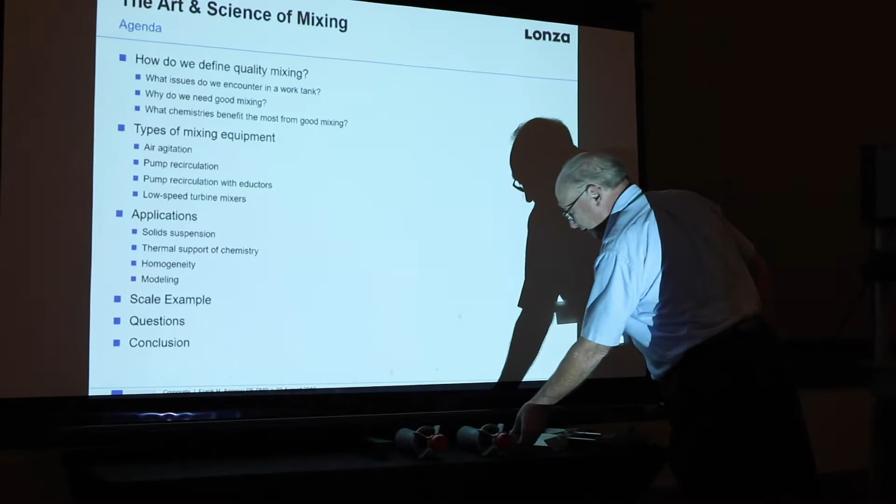There we go. Here's my agenda for today. How do we define quality mixing? I want to talk about what issues we encounter in tanks, why do we need good mixing, and what chemistry - some of this I've already covered in my introductory comments.

I want to talk about different types of mixing equipment, and I want to try and overcome some of the assumptions and presuppositions that are associated with what's good, what's bad, and what works best.

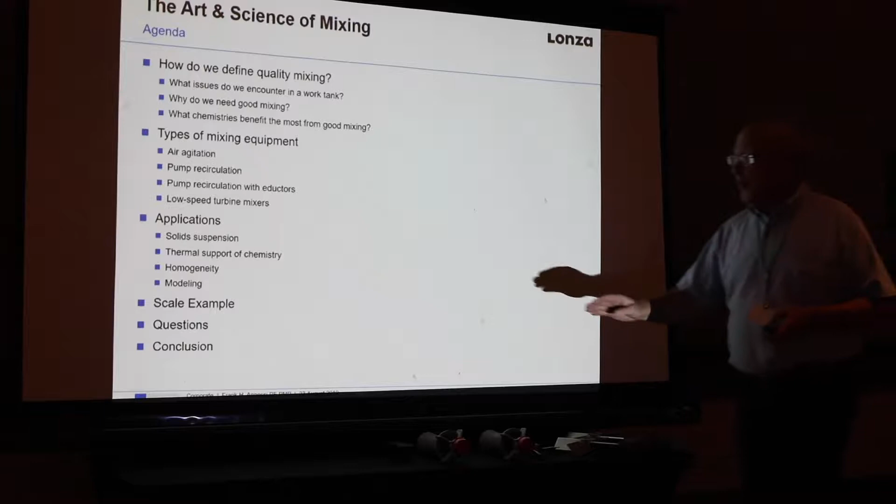Then I'm going to go through, and I'm hoping this will be helpful because, you know, Lonza does not manufacture penta or any oil-borne wood preservatives. However, the engineering group at Lonza has worked with every preservative system that's in North America. We have an extensive background. I've drawn on an example where we worked on a penta system to illustrate a couple of interesting features, and I want to suggest some things you can do with mixing and with creative uses of instrumentation.

And then what we're going to do is we're going to fire Junior up here, and I'll talk a little bit about what we've got here. Yes, it's water, it's not vodka, it's not margaritas, it's not anything like that. And no, we're not going to use this as the basis for creating a microbrewery. I don't know what I'm doing.

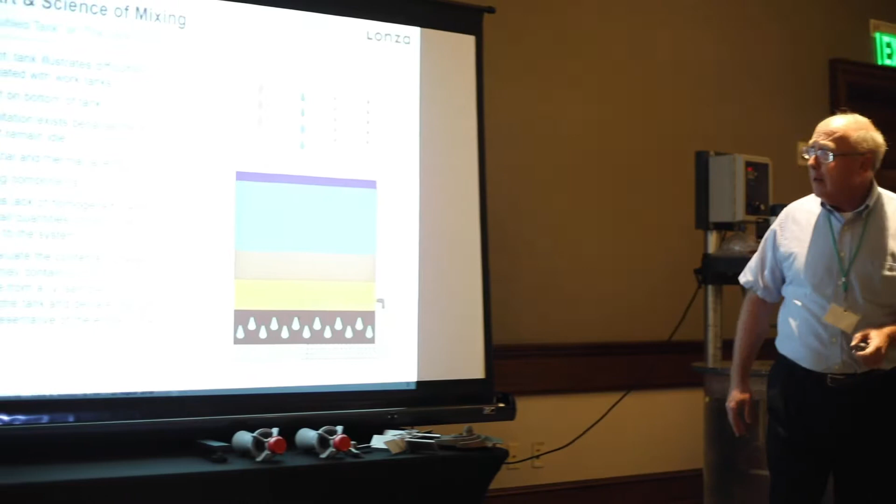So, if any of you have ever been down to Disney World, you know about the Tower of Terror. So I've made the Tank of Terror. I've tried to sit down and figure out how many different things can go wrong inside of a tank. I'm not saying this is comprehensive, but it's my best shot.

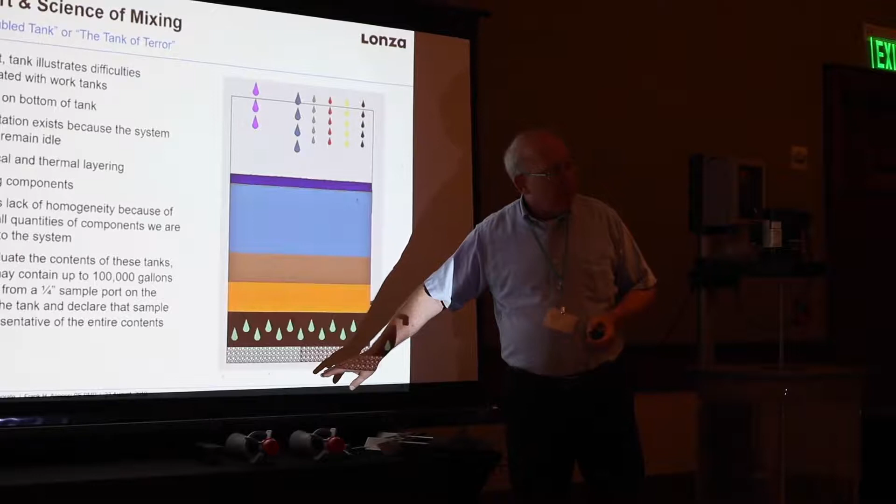So we could have fallout at the bottom of the tank. We could have CCA fallout. We could have debris from pentachlorophenol systems. Typically your CCA fallout is because of wood sugars reacting in the tank and precipitating.

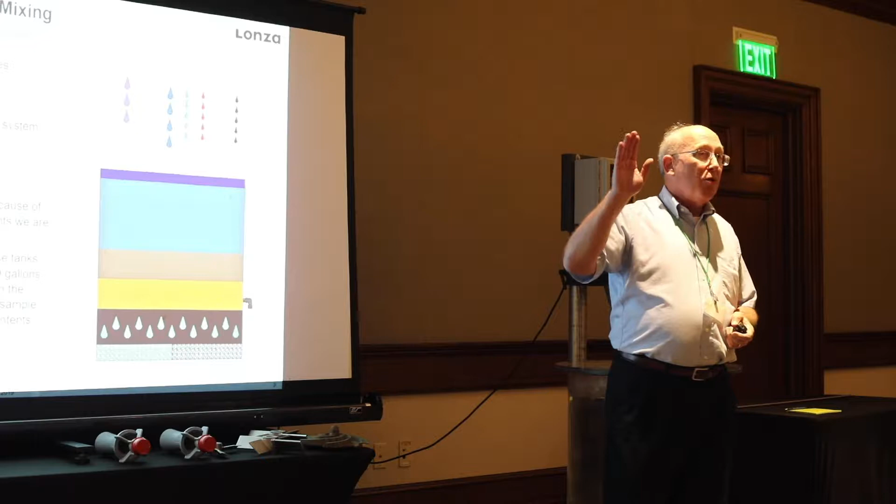As a sidebar, CCA treaters, how much initial vacuum, what's the lowest amount of initial vacuum you should ever pull to prevent CCA fallout in the tanks? Anybody know? Nobody's raised their hand. Either you don't know or you're shy. I'm going to tell you, don't go below 18 inches of initial vacuum. If you do, you're asking for trouble with round stock. 15 inches tends to be the threshold with dimensional lumber.

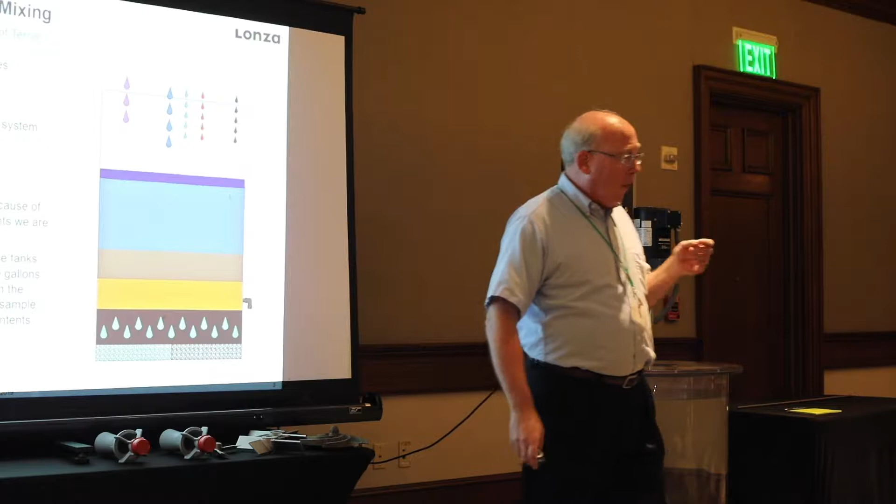Precipitation exists in the bottom of the tank because the system is idle. Now, I know historically we've always worked under the impression that the turbulence associated with flow, filling and emptying the treating cylinder, is sufficient to keep everything suspended. And that is true to an extent.

But with the round stock systems in particular, where you've got 10-inch, 12-inch lines and moving solution 4 to 6,000 gallons a minute, into a tank that's got 50,000 gallons, you're not turning things over enough to keep everything mixed up. The fact of the matter is that when we fill the cylinder, even at those flow rates, basically once the cylinder is full, what's in the cylinder is static and idle, if you think about it.

Every one of the competitors seems to control pressure in the cylinder during the pressure step a little differently. Some people like to deadhead the pressure. We have a tendency to have a control valve and flow things through, so I'm getting some movement through the treating cylinder, which is by design. But even that, I'm only probably moving 200 to 300 gallons a minute. So there's not enough turnover in the process of filling and emptying the cylinder to keep anything that is falling out in the bottom of the tank from really getting stirred up and keeping it in solution.

That's a problem, because long term, at some point, you're going to have to empty this tank, and when you do, you're going to be cleaning that out. I don't need to talk to any of you about the costs of cleanup. I think you're all completely aware of that.

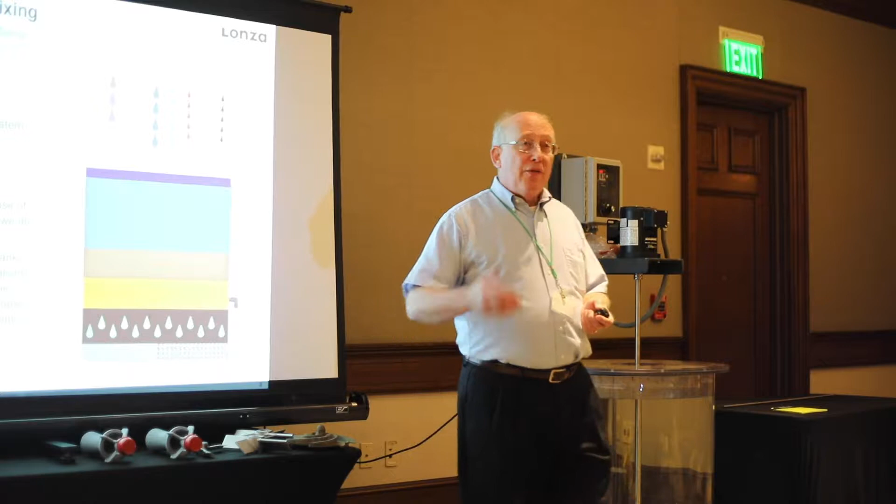The other thing we see in the tanks, and this is more unique to oil-borne systems, is you're going to get chemical and thermal layering. As your feedstocks, as your carriers are coming from different sources, they're going to have different properties. You really can't effectively blend them in the process of filling the tank back up after you treat so many charges. It just doesn't work that way. Those different carriers are going to separate, they're going to float on top of one another. It's not even the turbulence associated with filling and emptying the cylinder - it's going to take a long time moving that solution back and forth to try and get it homogeneous.

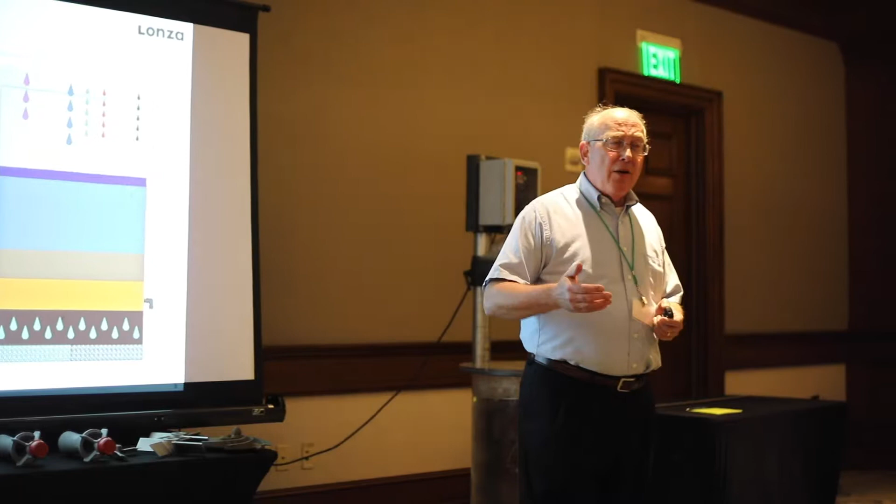Then, as some of you are aware, the copper azole systems have floating components. Now, I know that of late, we and the competitors have started fielding systems that have suspending agents in them to keep that from happening. But initially, when we put copper azole in the field, within minutes, the azole system would float to the top. You can't resuspend something on the top of a tank with a pump recirculation system. It doesn't work that way. So that's a problem.

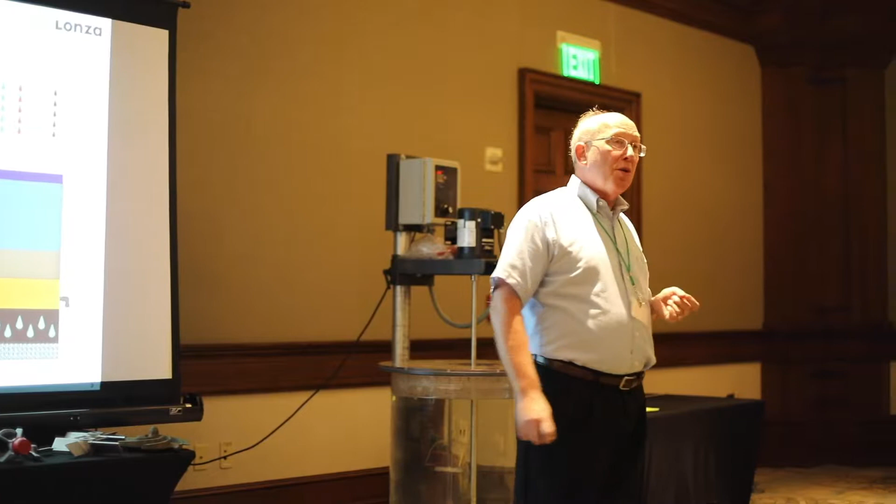All the new wood treating systems in development, I like to describe them as finesse systems made up of squishes and squirts. They have mold inhibitors, corrosion inhibitors, defoamers, and we're adding them in very small quantities into a 20 to 30,000 gallon tank.

We say it's adequate, and then like we've done for the past 90 years, we send the operator out, have him take a sample out of a quarter-inch sample port, and say that sample is representative of the tank. Now, everyone in this room knows that is not a true statement, but we really haven't had anything else to work with.

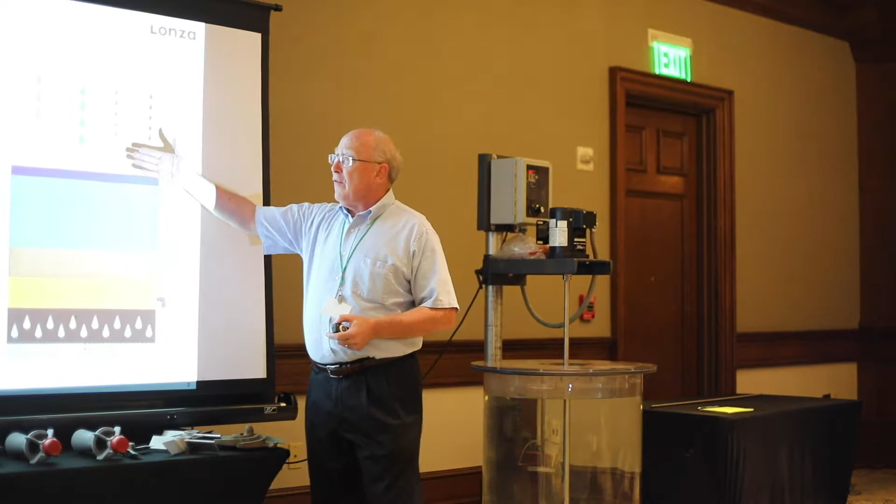These are some of the problems that lack of homogeneity manifests itself when you have a tank that's got either small quantities, floating components, separation due to different properties, or the fallout, precipitation at the bottom. These are all things that all of you are familiar with.

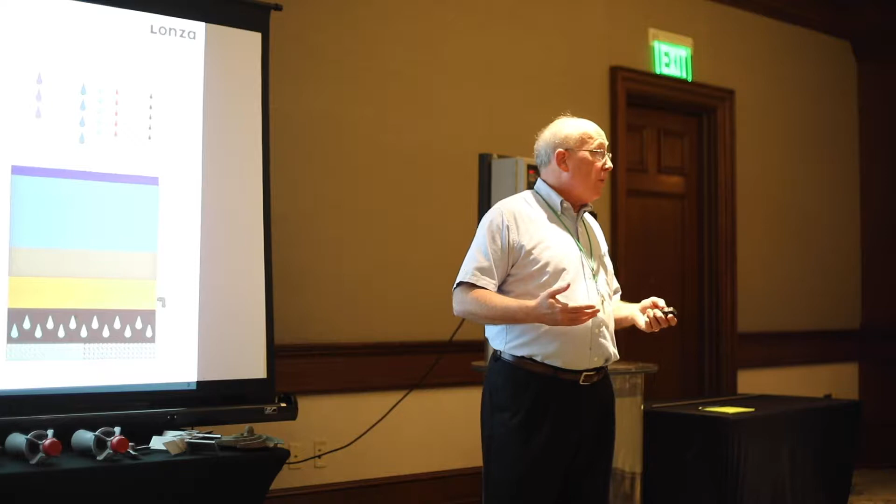The argument I'm trying to make is that if we can overcome this, if we can overcome the issues with these tanks, if we can make the contents homogeneous, we're going to do a better job treating, we're going to do a better job with our cost control, and quality control is going to be easier.

So why do we need good mixing? We need good mixing to maintain the integrity of our treating solutions. The current family of finesse wood preservatives are not true solutions.

CCA is a true solution, believe it or not. Thick as it is, it's a true solution. But all the new systems are not true solutions, and they require agitation to keep them together.

It's kind of like baking a cake, to be truthful with you. You add all the components in the mixer, turn it on, stir it up, and you come out with something good. We need to improve the quality of our treating.

I'm fully convinced that if we were to apply the technology I'm talking about to historical finesse systems, creosote systems, copper naphthenate, it doesn't matter what it is, it would improve the quality of our treating.

We need to control solid formation and settlement. Most of you are dealing with round stock, and I don't need to tell you about what is brought into your treating systems from round stock laying in the yard. You got wood fiber, you got chips, you got sand, dust, dirt.

All those things are being taken into the system, despite your best efforts, and I think some of the measures I've seen are very heroic. But to the extent that they precipitate and fall on the bottom, you wind up paying the price long term and the cost of generation of hazardous waste.

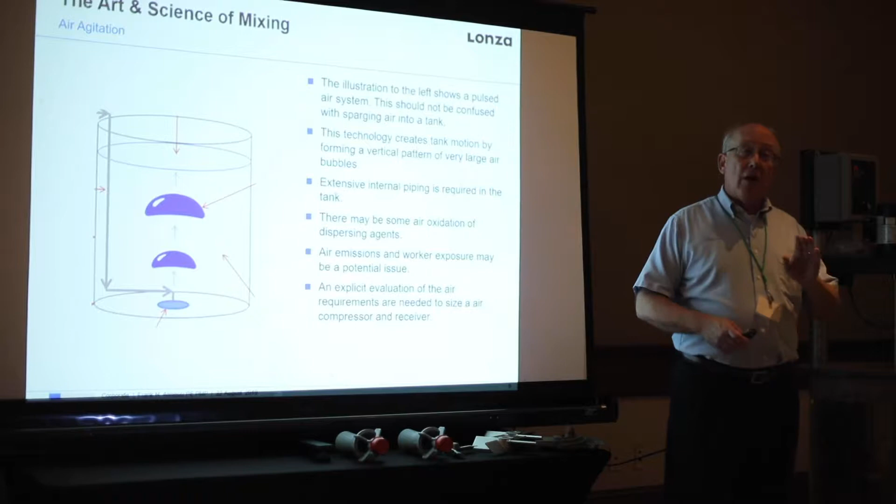The first one is air agitation. And by that, I'm not talking about sparging large volumes of air bubbles into a tank. There are a lot of older wood treating plants I've been to where they'll put a ring into the bottom of the tank and blow an enormous amount of air into the tank, hoping it will help get some motion moving, create a pattern, and stir everything up.

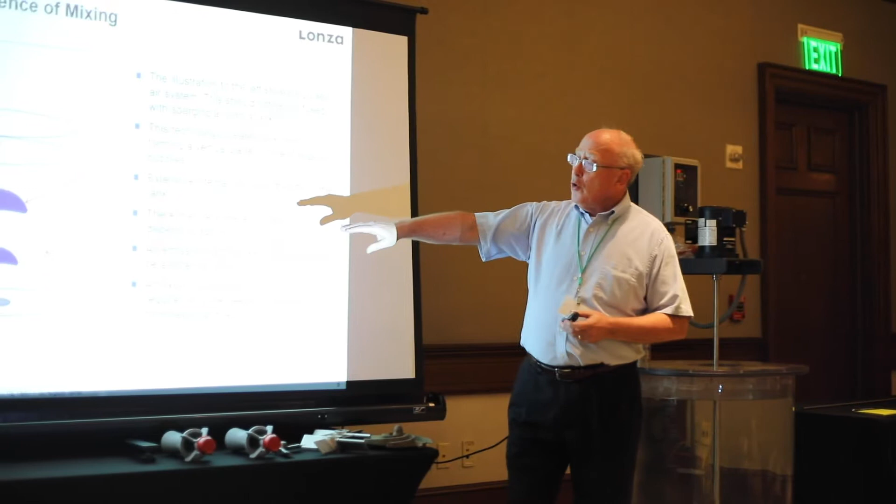I'm here to tell you that does not work. What does work is technology developed in the oil fields where you install a series of large diameter plates, 1 foot to 2 foot in diameter depending on the tank size, in a pattern in the bottom of the tank, and you use air to form large air bubbles.

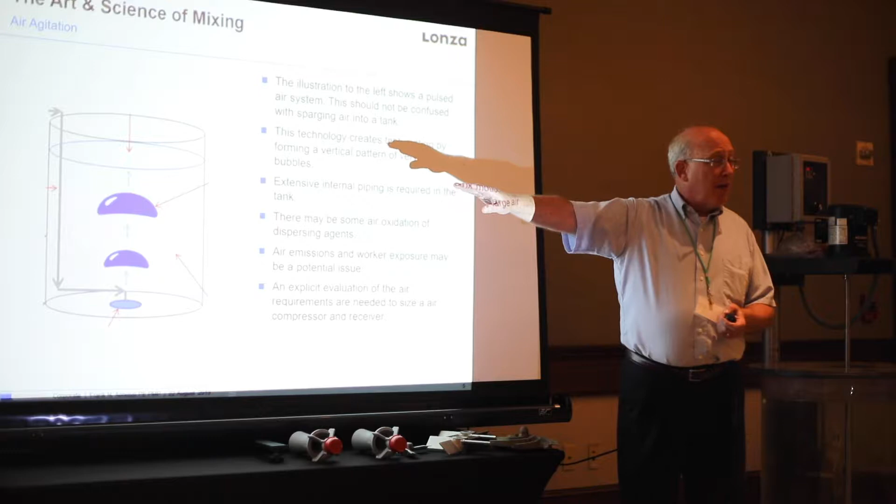These bubbles are 1 foot to 2 foot in diameter. If you sequence the pattern correctly, it will mix the tank up. The upside is that the technology does work to some extent. It requires extensive internal piping because you've got to run some 2-inch lines from the top of your tank all the way down to the bottom where these bubbles are being formed.

Areas of concern: I don't know whether all of you are aware what the standards are for the tanks we're using, but they're basically designed to API 650, which is a 1 atmosphere tank. So it frightens me a little bit to be blowing air bubbles into a tank with the possibility that the top of the tank, where the vent's supposed to be, gets sealed off. That would be an unpleasant situation. So I've never really embraced this.

The other issue is that anytime we're blowing air through a wood preservative, there may be some oxidation of the dispersing agents, there may be air emission and worker exposure issues, and you would have to do an explicit evaluation of the size of the air receiver and compressor you would need, because the volume of air you're blowing into this tank with these large bubbles is enormous. And you've got the air compressor running all the time.

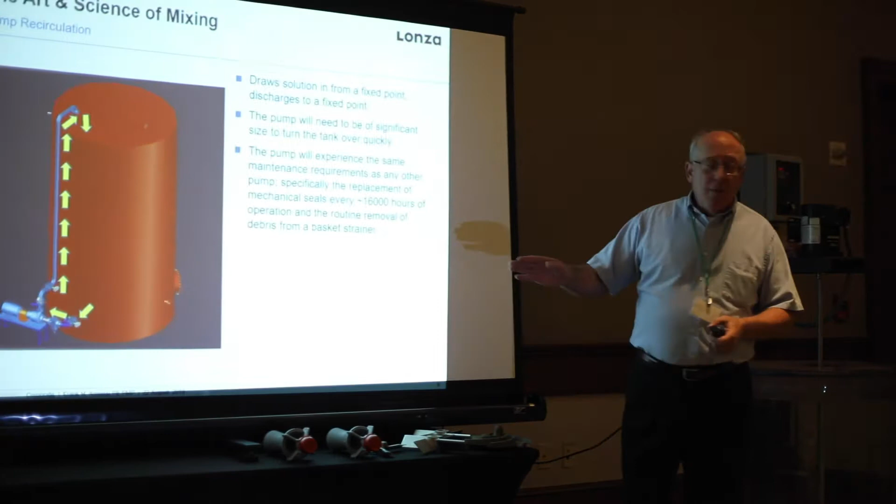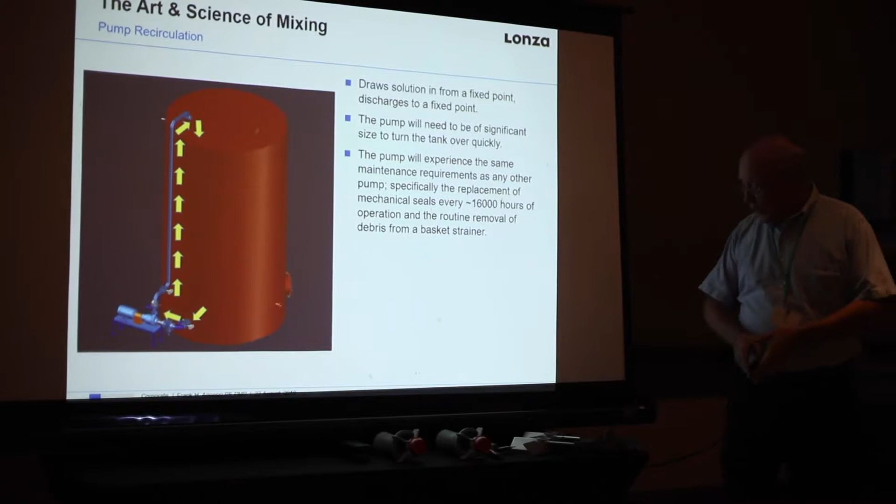What's more common is pump recirculation. As I've shown in my drawing here, we're taking a pump, sucking out of the bottom at a single point, discharging at the top, and turning this over. There's a lot of folks that do this—pump recirculation—and I've got an impeller here I'm going to show you.

The pumps are normally operating at one of the 4 synchronous speeds associated with 60 hertz equipment in the United States: 900 RPM, 1200 RPM, 1800 RPM, 3600 RPM. Centrifugal pumps are very good for creating pressure and moving solutions at ranges of gallons per minute up to about 2,000 to 3,000 gallons a minute.

So I want you all to do the very sophisticated engineering math: if I've got a 50,000 gallon tank and I'm circulating at 2,500 gallons a minute, how long is it going to take for me to turn that tank over one time? 20 minutes, right? It's a long time. And the truth is you don't even have a good feeling whether you're getting all of the contents of the tank completely circulated, because it's a point suction and a point discharge.

There's another downside. This is an open impeller. It's been trimmed to about 9 inches. If this is turning at 900 to 3,600 RPM, what do you think it's doing to the treating solution?

It's shearing it. I participated in the first trials of our ET solution at a plant I won't name for you, and we were having difficulty with ET initially because it was just too thick. We needed to shear it. We brought in some commercial shearing equipment, and it wasn't sufficient. So we went back to Conley where we store equipment. We brought a 100 horsepower, 4-inch suction, 3-inch discharge, 9-inch impeller centrifugal pump, and I guarantee you it tore the solution apart in no time. So it's good for that.

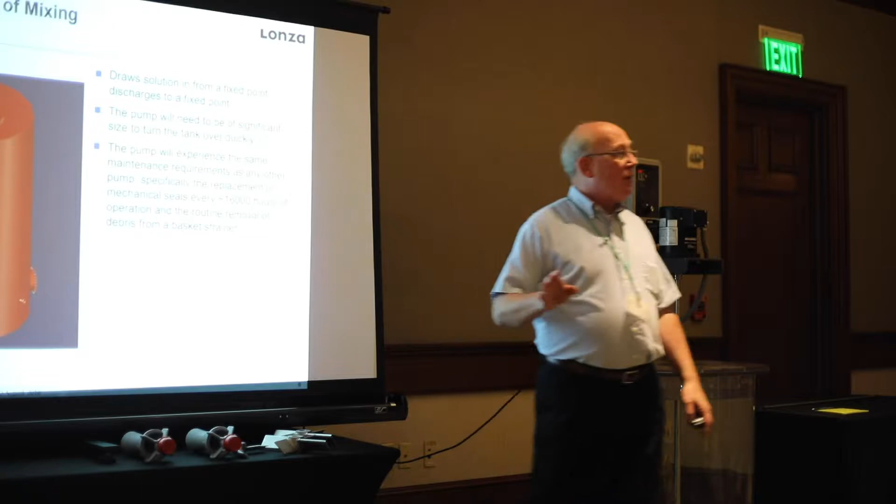A couple of notes about pumps. Now, I've worked with a lot of centrifugal and different types of pumps. You're going to have a basket strainer in it. We've already talked about precipitation forming in the bottom of the tanks.

You're going to have a basket strainer on this piece of equipment to keep debris from jamming the pump up. That particular blade being passed around will pass quarter-inch solids, but we all know at a pole plant, a kiln operation, you're going to have large pieces of debris. So your operator's going to be going out there having to change and clean that basket strainer out all the time.

So I want to show you a different technique using a centrifugal pump. You can pass one of these around. I don't know if you've ever seen this - this is a tank mixing eductor. These happen to be plastic, 1.5 inch diameter. If you recall high school chemistry, when you needed to pull a suction on some of your test tubes or lab equipment, you would turn on the faucet and there'd be a little rubber hose with a little fixture on it. This is the same thing - it's a venturi.

You take the discharge of your pump into the back end, and you'll notice there's a nozzle here. What the nozzle does is create a low pressure point, kind of like the lift effect on an airplane wing. This draws solution through the open louvers on the 4 sides, and it will magnify the discharge by a factor of 2, 3, or 4. Let me pass this around - I've got 2 of them. The plastic ones are fairly inexpensive, and they get pricier as you get up in size.

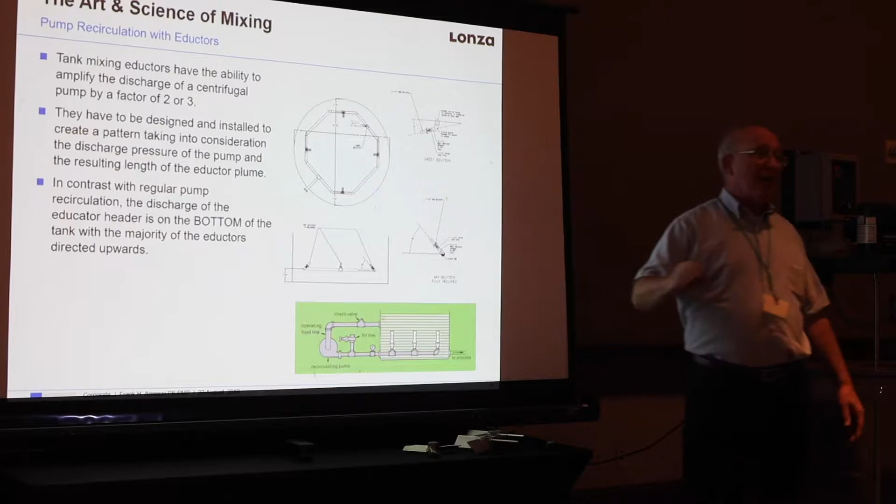I've seen these employed in a variety of different ways. The best way to do it - I call this a poor man's mixer - is to create a pattern in the tank. You'll notice this drawing has 5 tank mixing eductors on it. One of these should be pointed to the floor, and we call that the sweeper. The reason is, even though you operate this periodically rather than continuously, you want to be able to get any solids that have precipitated resuspended.

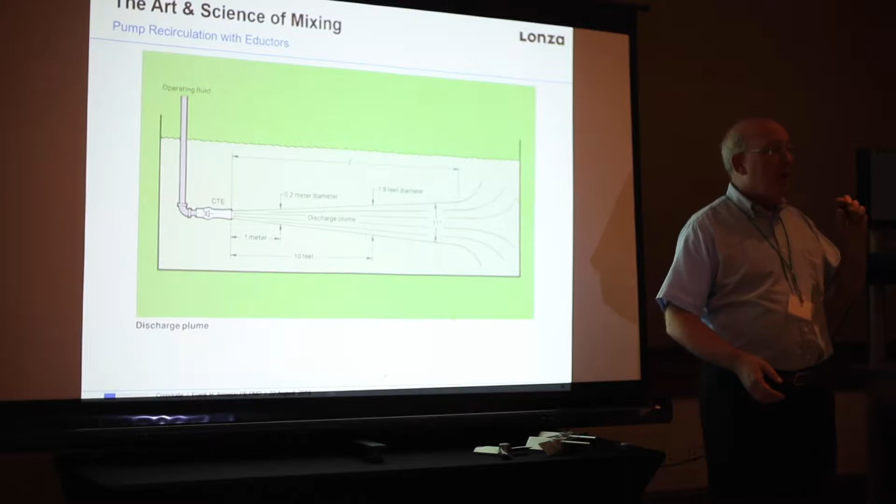So you have the sweeper going to the floor, and then you point the other eductors upwards. Now, there's a little engineering required with this, because depending on the height of your tank, you have to design the number and size of the eductors, taking into consideration the size of the discharge plume and how far out it's going to go. In other words, if I put one gigantic eductor on a really small pump, I'm not going to get a lot of mixing, and it's not going to go very far.

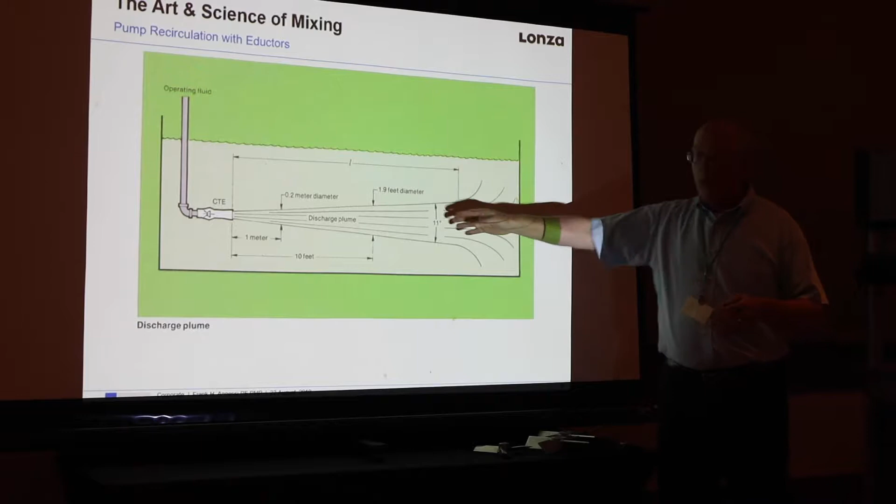However, if I have smaller eductors - these are 1.5 inches going around the room here - and I size them with a pump that gives me enough discharge pressure, I enjoy the benefits of multiplication coming out of the nozzle, 2 to 3 times, plus the discharge plume will be long enough to get to the upper reaches of the tank. It's a little bit of a finesse - not difficult, but you can't just buy the piece of equipment, stick it in, and assume it's going to work.

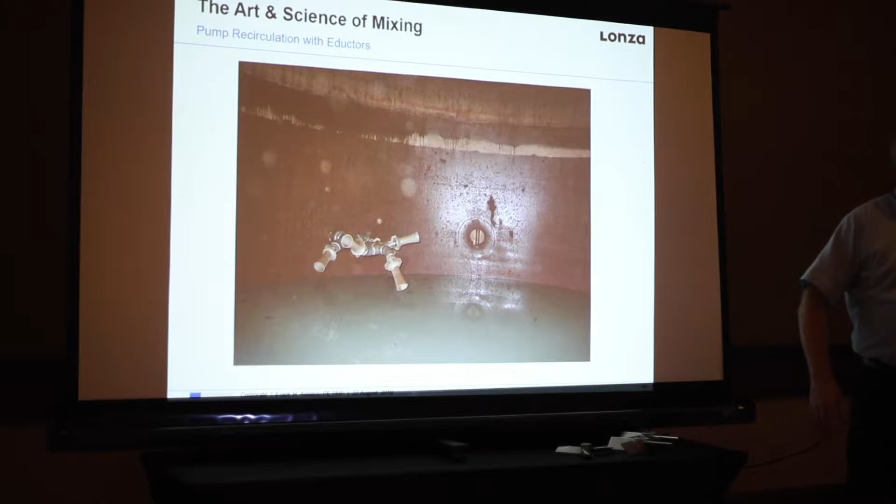And here's a picture - don't ask me how I got the picture, okay? Don't ask. This is someone's attempt to make a little patterned eductor setup. This has got 4 - you see the one pointing downward, it actually got 2 and 2 up. It was just a quick way of trying to install them in the tank. It's a waterborne tank, by the way.

And that brings me to turbine mixers. I've probably installed close to 300 of these pieces of equipment. People seem to think that they're burdensome as far as the cost of installation and operating costs. I'm here to tell you that that is just not true. This piece of equipment is low horsepower, and it typically turns - this is what I wanted to impress upon you - 40 to 70 RPM.

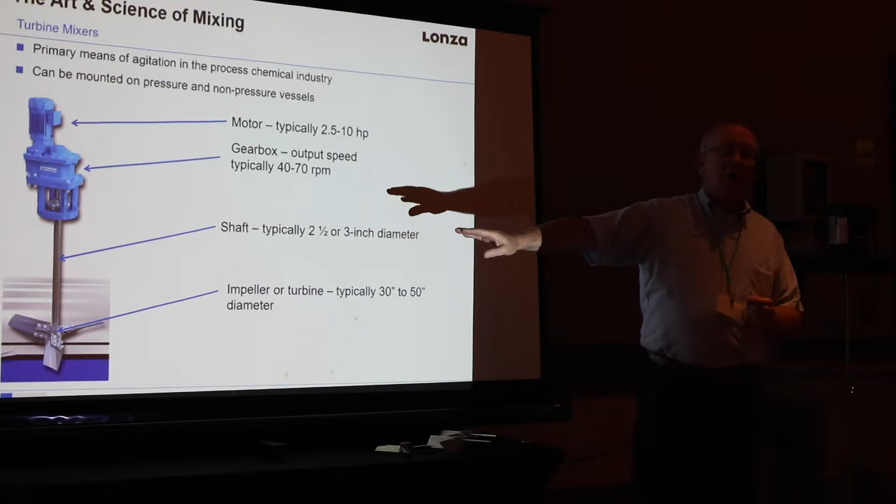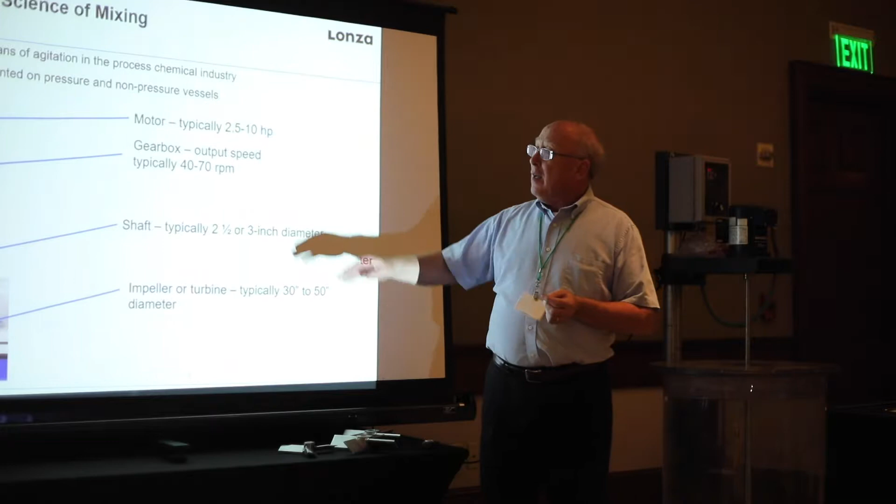So if you remember that impeller going around, a centrifugal pump is going to operate at one of the 4 synchronous speeds - 900, 1200, 1800, or 3600 RPM. Typically, your agitators, your turbine mixers, are only turning 40 to 70 RPM. I'm going to work through some examples to give you an idea of the pumping capacity of this equipment. The operating costs for a piece of equipment like this are typically $480 per horsepower per year.

So if you've got a 2 horsepower mixer, it's costing you $1,000 a year to operate it.

Now, I don't know about you, but I'm going to make the assumption that all of you have the best plant managers and operators, and you never have a problem, and your forklift and lift operators don't ever bang into building columns, and they don't ever tear equipment up, and they don't intentionally walk away from maintenance procedures, and they don't let vacuum pumps run dry, and they don't ever do any of those things, right? Your guys never do any of that sort of stuff. I know that. I've been there.

Well, what I love about this piece of equipment is that, first of all, it's mounted on top of the tank, so they can't get at it to hurt it. And the second thing is that the maintenance on this, you change the oil in the gearbox once a year, and you forget it. And it runs all the time. You don't ever turn it off. You turn it on, you let it run. It just runs.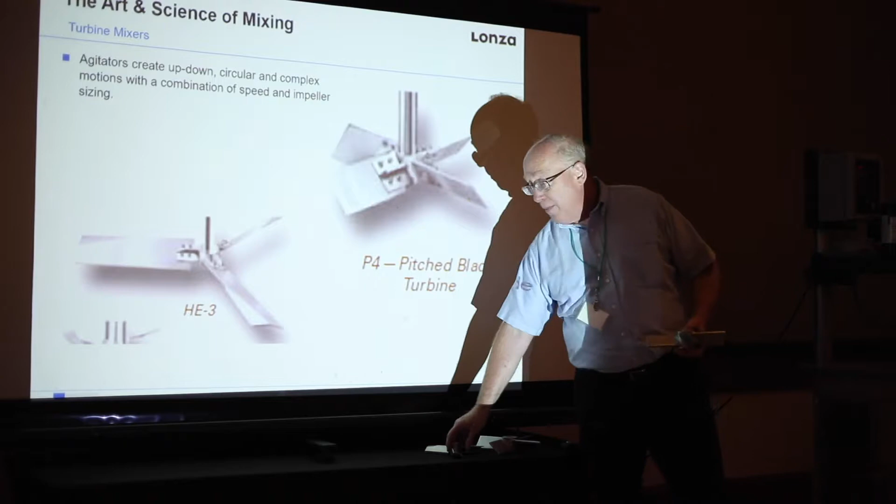The shafts are typically 2.5 to 3 inches in diameter, and then we have an impeller that's 30 inches to 50 inches in diameter. I'm going to show you one example here of a couple agitator applications.

These pieces of equipment create up, down, circular, and complex motions, and they do that with a combination of the size and shape of the agitator blades. You see the one in my left hand here has 4 blades, and I'm going to pass this around. Be careful when you hold it, okay? This blade is a pitched blade. In other words, as I'm holding it here, the angle of the blade is at 45 degrees. This blade, in contrast, is a high efficiency impeller, and it has a little bit of curvature to the blade.

The one I have in the tank here is a 10-inch blade. I'll pass these around. Be careful.

The agitators work by, as I said, a combination of the shape of the blade, the speed, the diameter, and it depends on the geometry of the tank. So we design these mixers for different applications, and this is a graphic rendering of the output of computational fluid analysis.

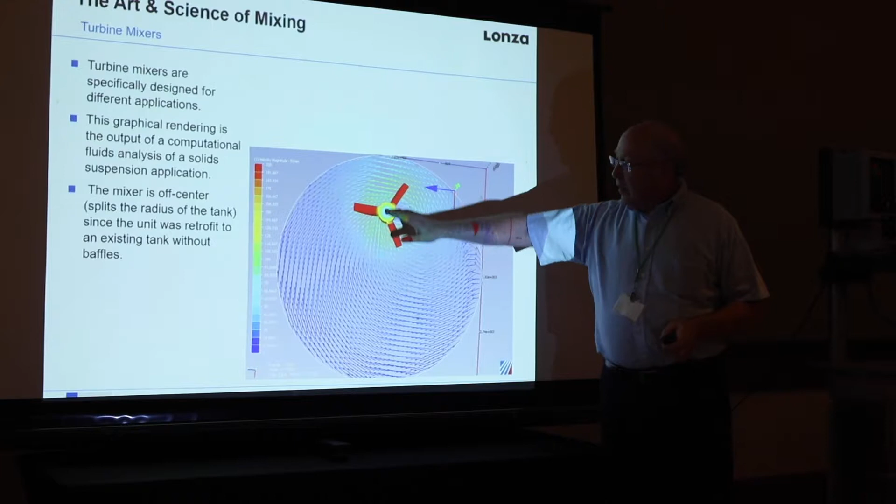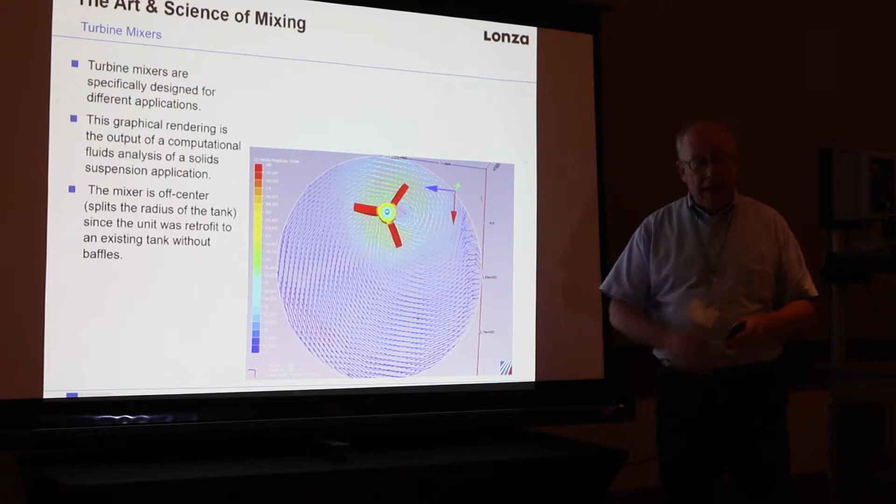This is an off-center design. You'll notice that the center line of the agitator is not in the center of the tank. What would happen if I took an agitator and put it into the center of the tank without any sort of internal structures? Does anyone have an idea? Create a vortex. You're absolutely correct. You would get the entire mass of the liquid moving all at once, and you wouldn't get good mixing. So as a consequence, and an accommodation, on new tanks, we will mount the agitator in the center of the tank as this one.

And you can look inside the tank. I've got baffles every 120 degrees in here. It's just a plate projection. Its size, the plate projection, is a characteristic of the diameter and the height of the tank, okay?

But as I was mentioning initially, agitation has moved out of the realm of art and technique and is really in the realm of engineering science. The motions, the applications, are very well understood anymore. So I'm going to show you an analysis.

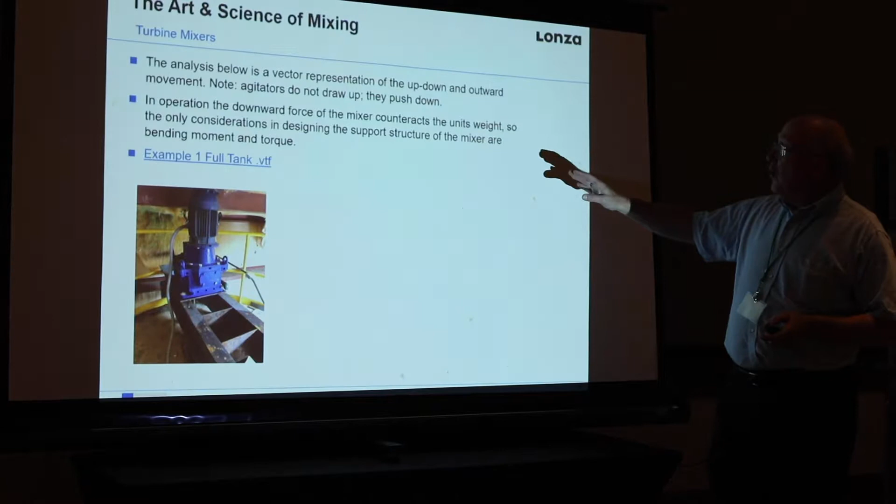This is a vector analysis showing up, down, and outward movement of an off-center agitator design. Here's a photograph of one that we took. You can see the agitator support structure, agitator mounted on it. Let's just hope this thing works here. How do you find my mouse? There it is.

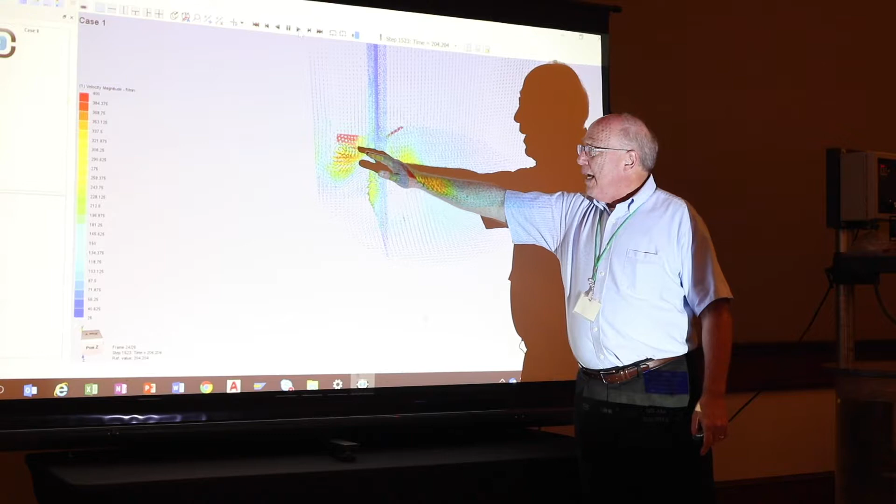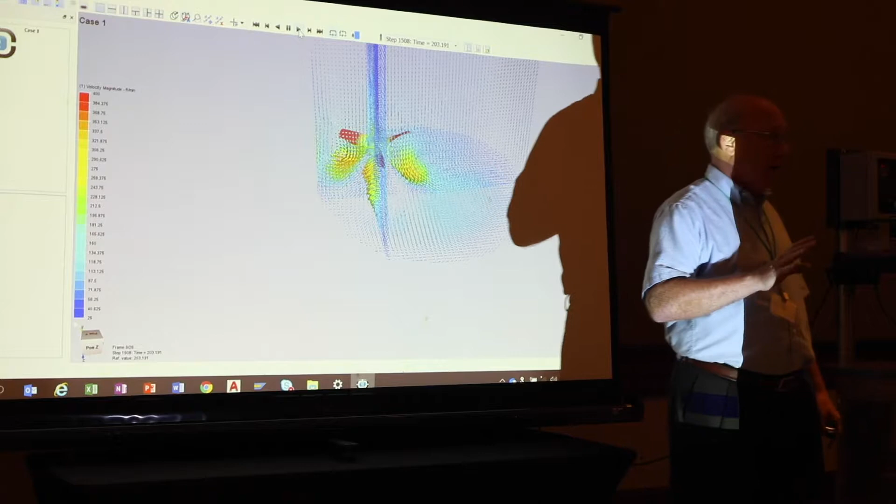Okay, this is a vector representation of the flow of an off-center agitator in a tank. The scale on the left side of the screen indicates the intensity and is representative of the amount of energy that the agitator is putting into the tank. You'll see on the exterior of the blade how red it is - that's where most of the work is being done. In this case, it's difficult for you to see from where you're sitting, but all the little blue dots here are actually vector arrows showing that the motion is down, then out, and then up the side of the tank.

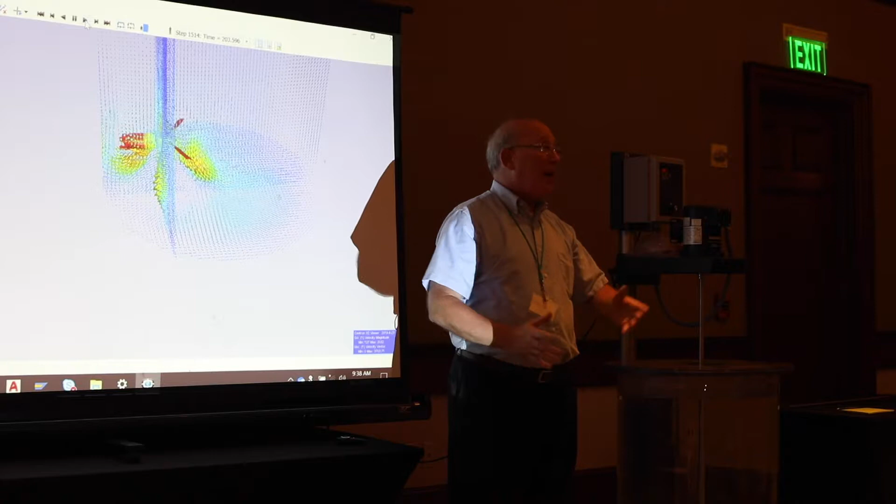Let me make sure everyone understands something about agitators, because I run into a common misconception all the time. When you're installing an agitator in a tank, it does not suck up, it pushes down. The motion is rather complex: it shoves down from the top, goes out, goes up to the top of the tank, and envelops it like this. That's why you can use mechanical agitation to suspend everything and anything in a tank, whether it's floating on top. It gets sucked down because of the force of the blade.

Just as a kudo, I got this design help. I do most of my agitator work with Chemineer, where they have a mixer specialist, and he helped me with these designs.

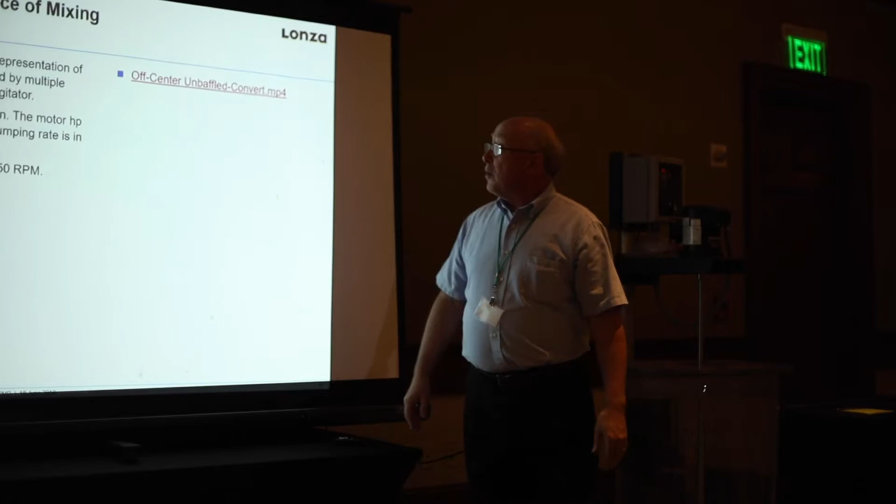That was a vector representation. I'm going to show you a raster representation. And this one is a little bit interesting if I can get this working here. Is that the Jamaican version? No, it's not the Jamaican version.

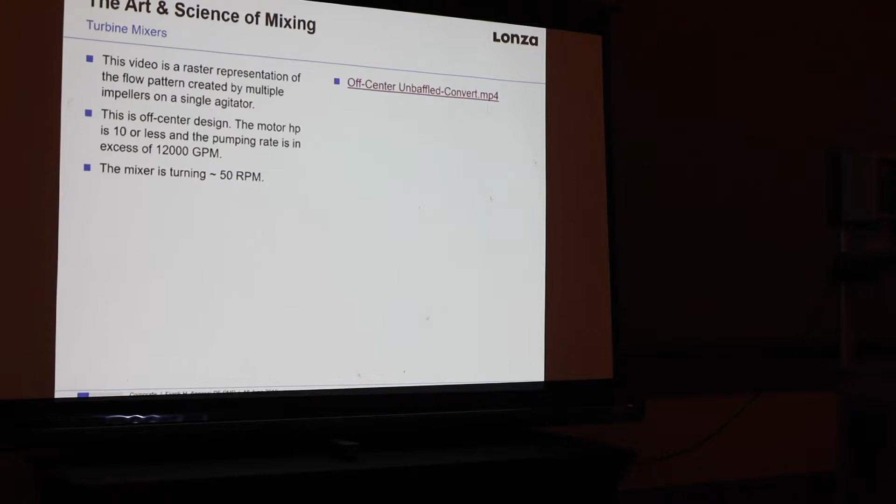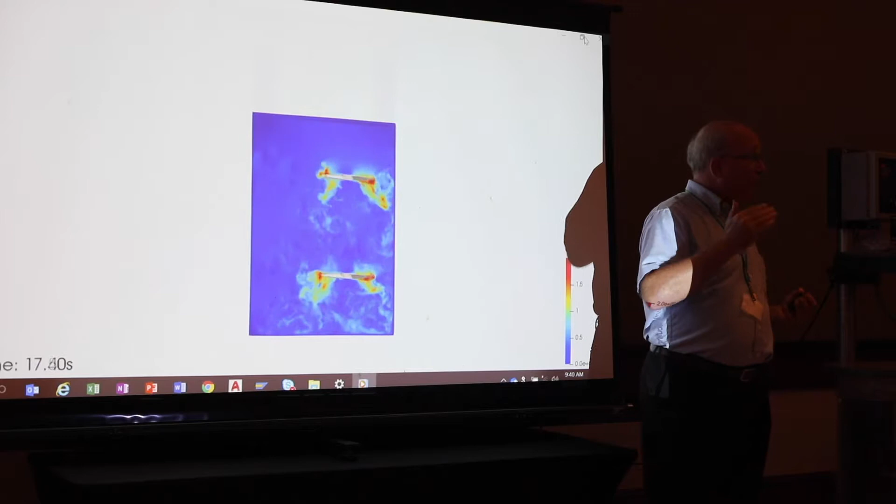This is a raster representation of a tank with two mixers in it. I asked them to put this together for me because in a tall tank, one agitator blade is not sufficient. You may have two, you may have three. This one has two, and what I need you to look at here is the intensity of the agitation shown by the color scheme.

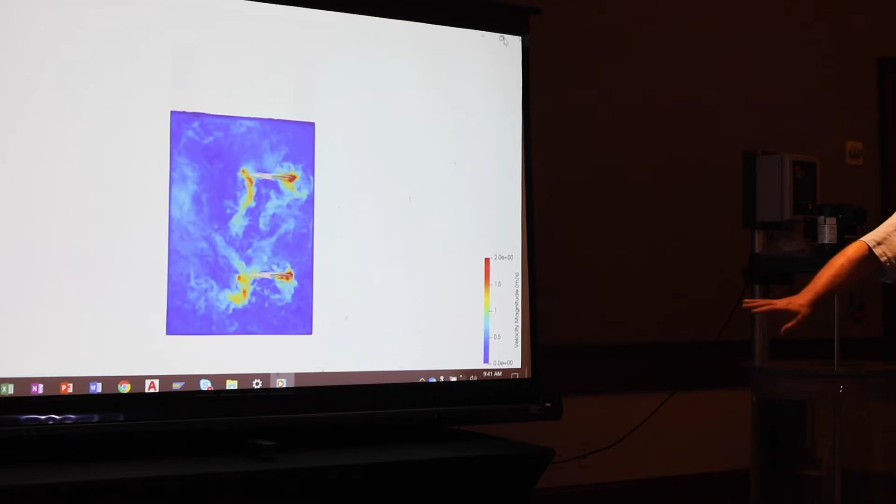As you watch this over time lapse, you'll notice that the liquid being pumped from the top mixer is making its way down to the bottom mixer, where again you'll see the outward motion here where it's coming to the top. Can everybody see that? Those of you in the back of the room, let me know you're alive.

This again is an off-center design. Off-center designs are used in tanks that already exist in the field, where we don't want to go to the time and expense of installing baffles in a tank. That would be an expensive, unnecessary expenditure.

The downside of having an off-center design is the following: the mixing isn't quite as good as it could be, and the equipment is a little more expensive because we've got to put more energy into an off-center design agitator for it to achieve the level of homogeneity that we're able to achieve with the center baffle design.

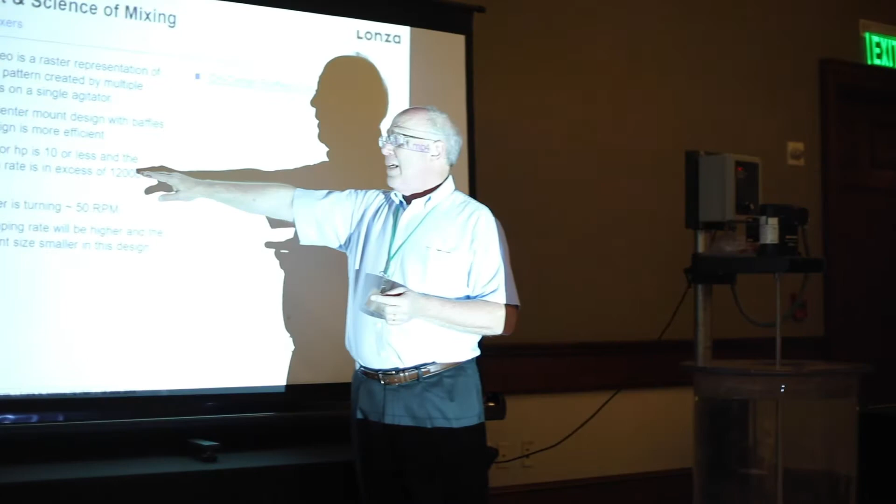So this pattern here is a little bit different. This was designed for a pumping rate in excess of 12,000 gallons a minute, and this mixer is turning at 50 RPM.

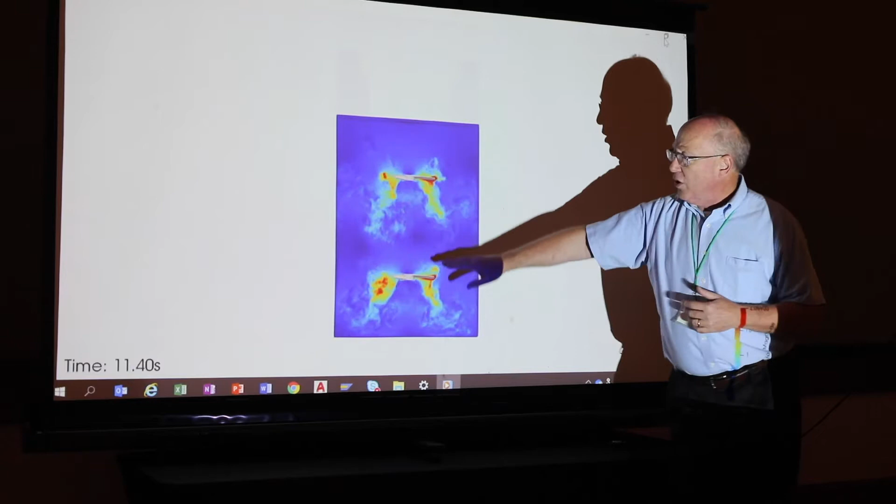You can see the agitators are both mounted in the center of the tank now, and there's symmetry in the pumping action. What I want you to watch is that eventually the liquid being pumped from the top blade will make it to the bottom, and you're going to see complete up-down motion. You see it here on the left side where it has already made contact with the lower blade. Can everybody see this? Okay?

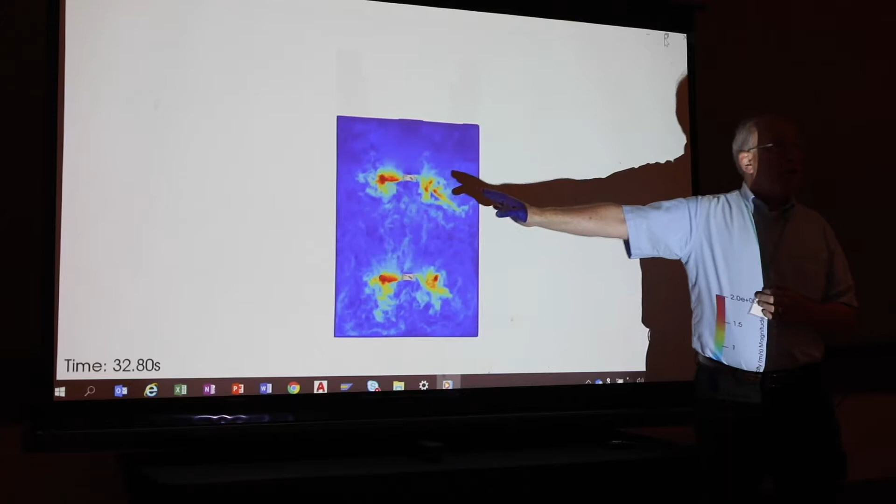Frank, you said a tall tank. What's your definition of a tall tank? We've agitated tanks that are 35, 40 feet tall, okay?

The problem with a tall tank, and we've seen this at all the pole plants, Ron, your plant has tall tanks, is where you get into a little bit of trouble if the height to diameter ratio gets really large. In other words, an 8-foot diameter tank that's 30 foot tall becomes a bit of a challenge, because the equipment's going to get expensive. The shaft on that may be 4 inches in diameter. Big shaft, okay?

All right, so let's look at some applications, okay?

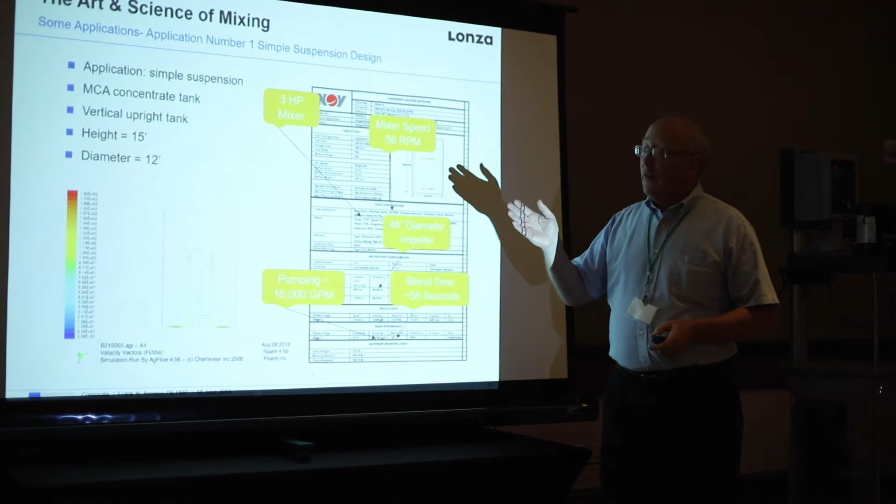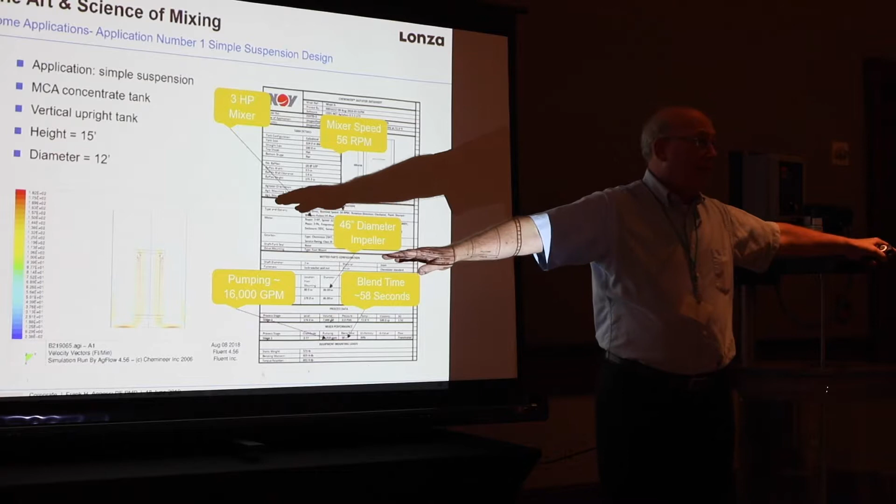The first one I would like to show you is a simple suspension of an MCA concentrate tank. It's a vertical upright tank, not very tall, only 15 foot tall, 12 foot diameter. I got from the manufacturer a computational fluid dynamics analysis. This mixer has 2 blades, a 3 horsepower mixer, turning 56 RPM. The diameter of the impeller is 46 inches. I'm 6 foot tall, so it's smaller than my wingspan. Here's what's interesting: the pumping rate of this piece of equipment is 16,000 gallons a minute.

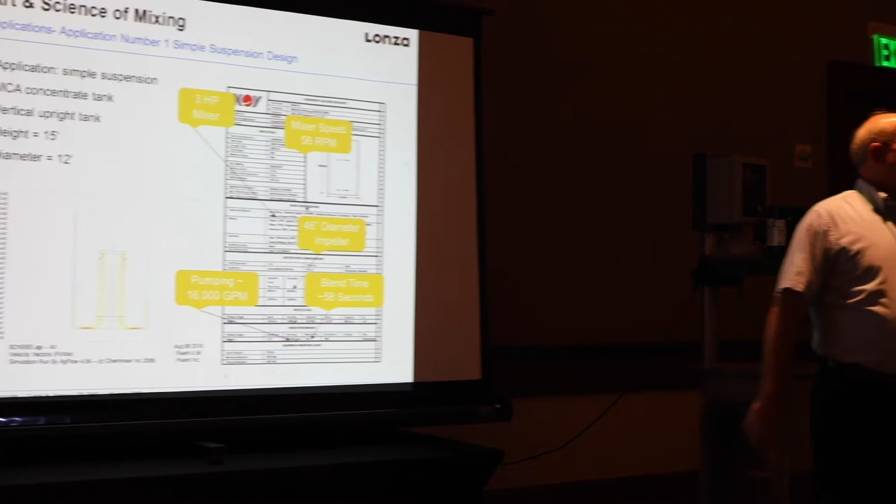16,000 gallons a minute. They estimate the blend time to 100% homogeneity at 58 seconds. That's with a piece of equipment that's only 3 horsepower. I could not achieve that with any of the other technologies I showed you before. It's not possible.

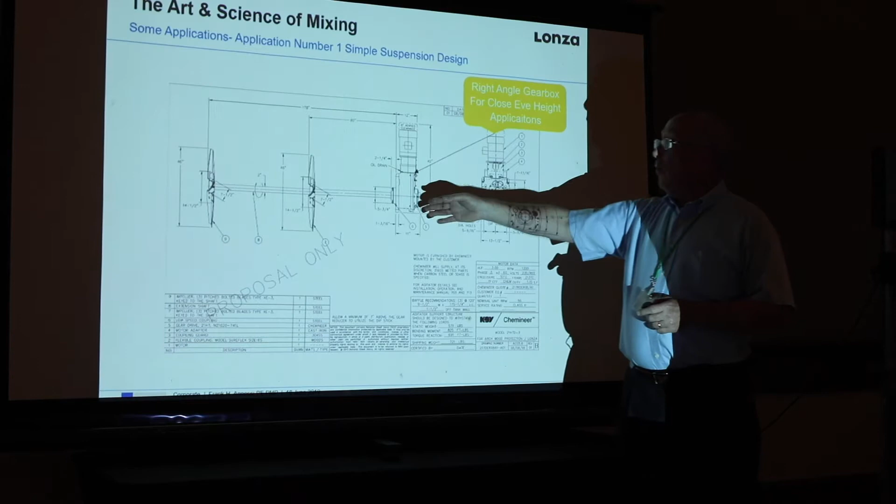Here's what the mixer looks like in design profile. We can get a variety of different gearboxes depending on what our clearance is. This one happens to be a right angle. Again, the maintenance on this is that once a year you go change the oil in it. It's on top of the tank, they can't get to it, so they can't destroy it.

This one here I hope you find interesting. This is a heat exchange application, a CCA work tank. Ron, you were talking about big ones - this one's 35 feet tall, 24 foot in diameter. This is a big tank.

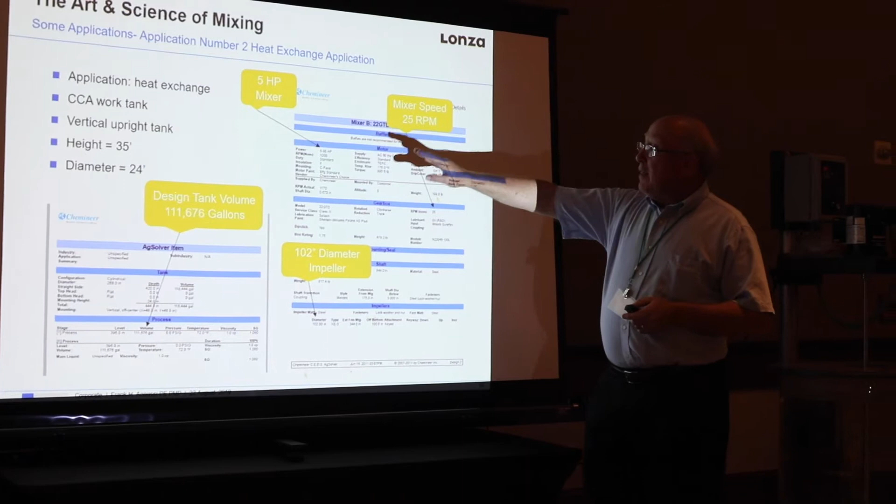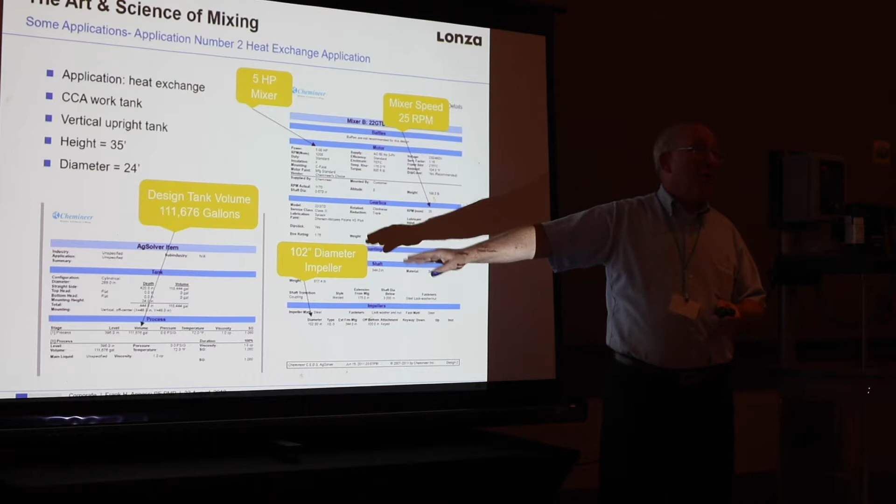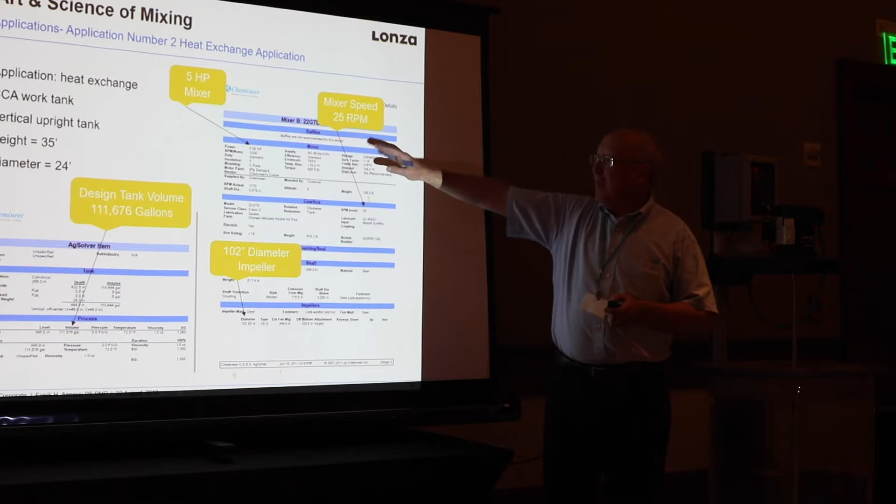We have a chiller system on it. I'll show you the design. The design volume is 111,000 gallons - this is a big tank. It's got a 102-inch diameter impeller, a lot bigger than my wingspan. The mixer is only turning 25 RPM, only 5 horsepower. The pumping rate is 59,000 gallons a minute.

And the blend time to 100% homogeneity from top to bottom is 13 minutes. Now that's moving fast enough where it can keep up with production. You can't change a pull charge out that fast, right?

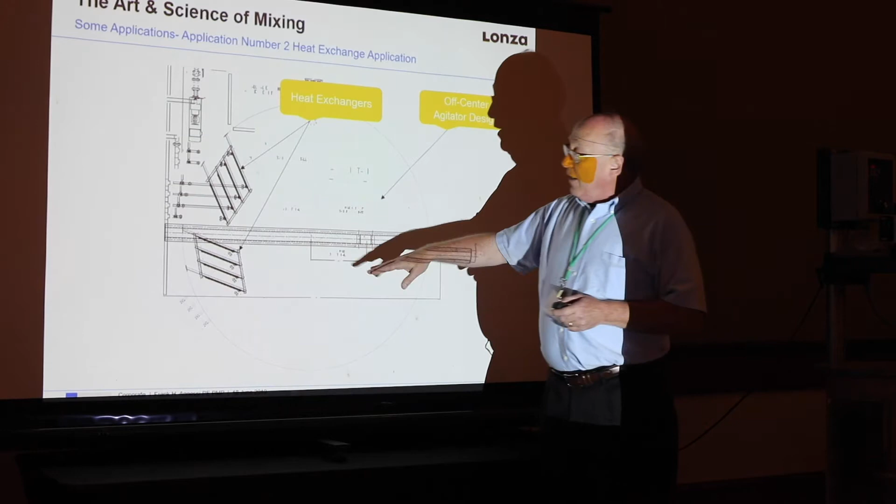We're just running chilled water through them. We're taking advantage of the angled orientation inside the tank so that the plates act as baffles. They interrupt the flow so we don't get the vortexing effect that you were talking about. The baffles actually work doubly - the reason this is so effective is that you're getting good mixing in the tank at 111,000 gallons, and you're getting enough turbulence by the plates on both sides. We're probably running 45-degree water through there, that's what you're going to get out of the chiller.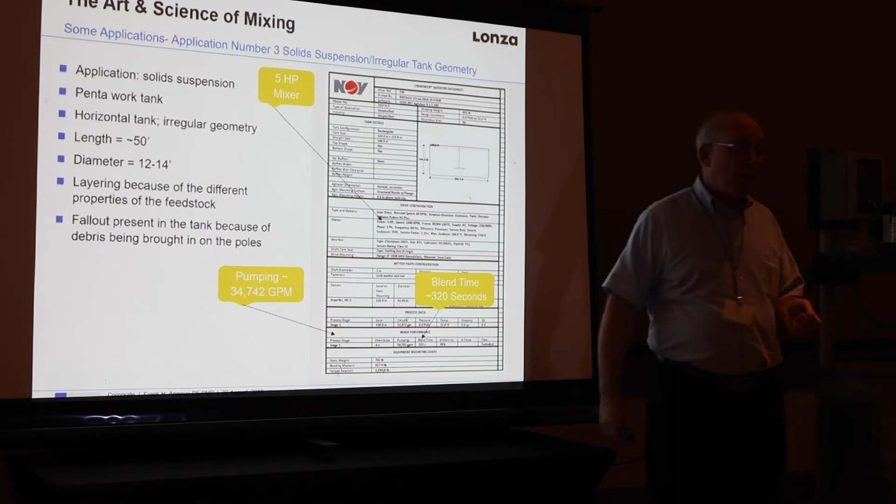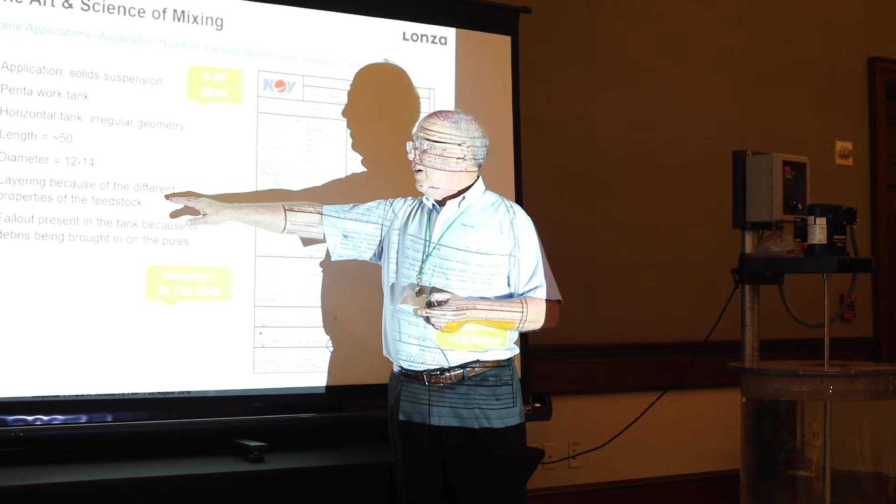Interestingly enough, mechanical agitators work very well with tanks of odd geometry - rectangular, square, or even horizontal tanks. The way that they accommodate them and modify the design is they will speed the agitator up a little bit to get more flow, and I'm going to show that to you. So in this case, we had layering in the tank because of different feedstocks, and we had fallout in the tank - we all know where that came from. That's the problem, right? Getting fallout in the tank.

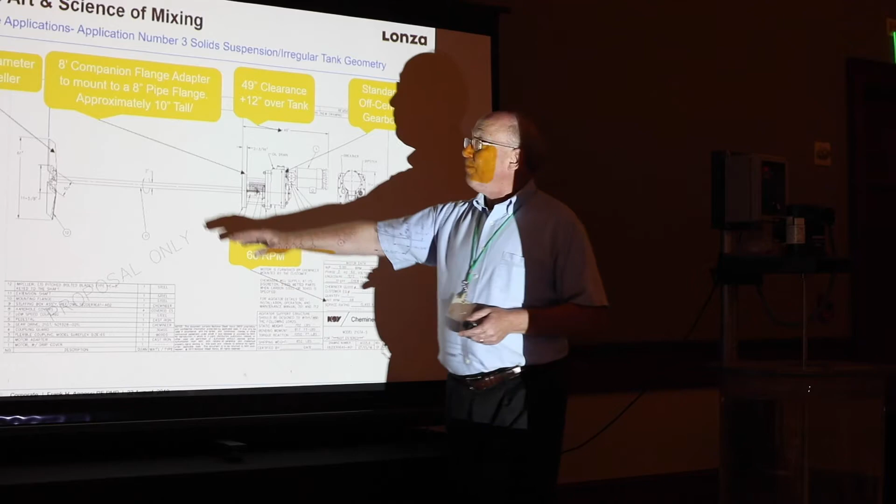So we put two 5-horsepower mixers on it. They were each pumping 34,000 gallons a minute. The blend time was 320 seconds. Here's what the agitator looked like - this agitator is turning 68 RPM, had a 61-inch diameter impeller.

We equipped it with a companion flange, so we did some specific analysis to put a pad plate on the tank with an 8-inch raised face flange. The agitator just bolted right to it. It's a standard off-center gearbox - the motor is not in the center line, this is the way they're traditionally built. And the mixer speed was 68 RPM.

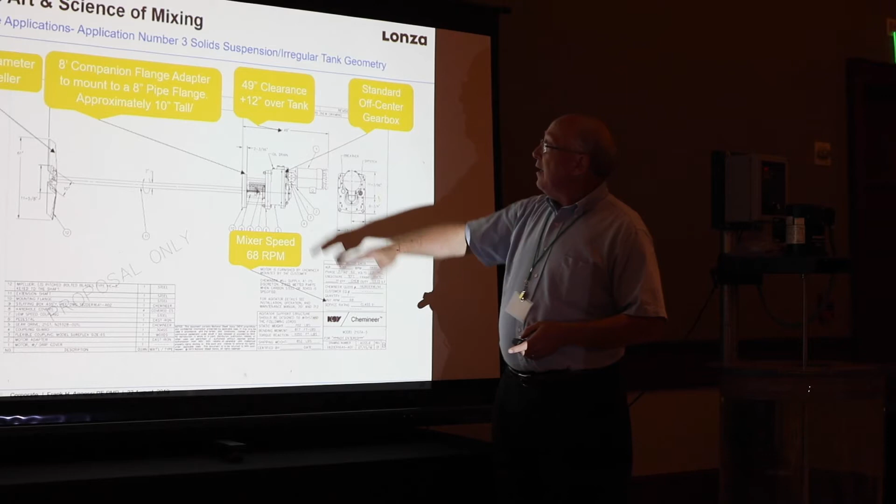Here's a computational fluid dynamics of two counter-rotating mixers. So what this is doing when it's in operation is moving like this - it took me a year to figure out how to do this. They're moving opposite one another. So what's happening is that the solution at the top is coming down to the bottom - I'm sorry, it's going the other direction, coming down through the blade, coming up to the top.

And here's what's key - you see in the middle here where they're joining together? So we've positioned the mixer specifically to accomplish this.

Now, here's what the mixer is going to do. Ron, here you go.

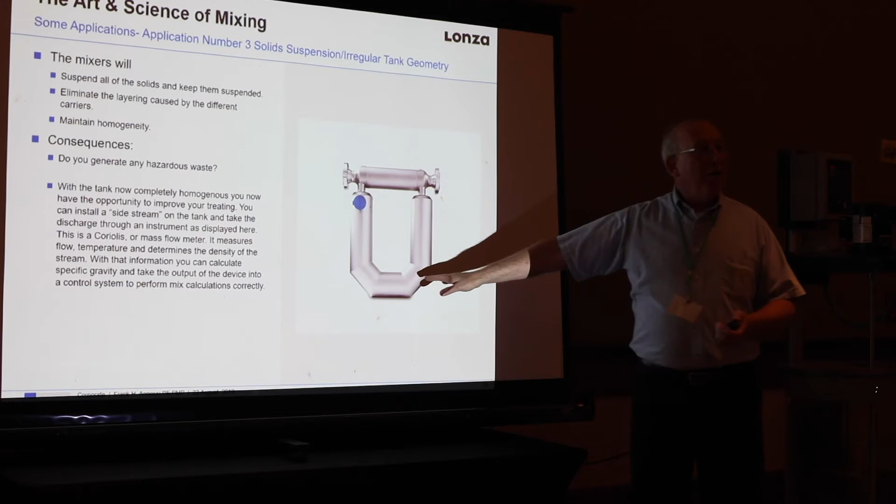The mixers are going to suspend all the solids in the tank and keep them suspended. So where are the solids going to go when you treat? Penta treaters, where are they going to go? They're going to go out in the wood.

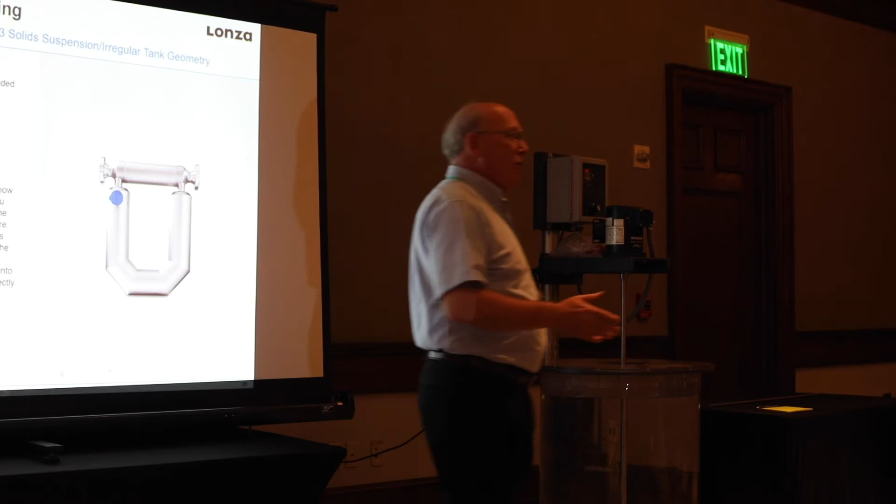You're getting different feedstocks, but now we're going to make everything 100% homogeneous in the tank. So if you get fuel oil from this carrier and fuel oil from that carrier, we're going to blend them. Now here's the interesting thing.

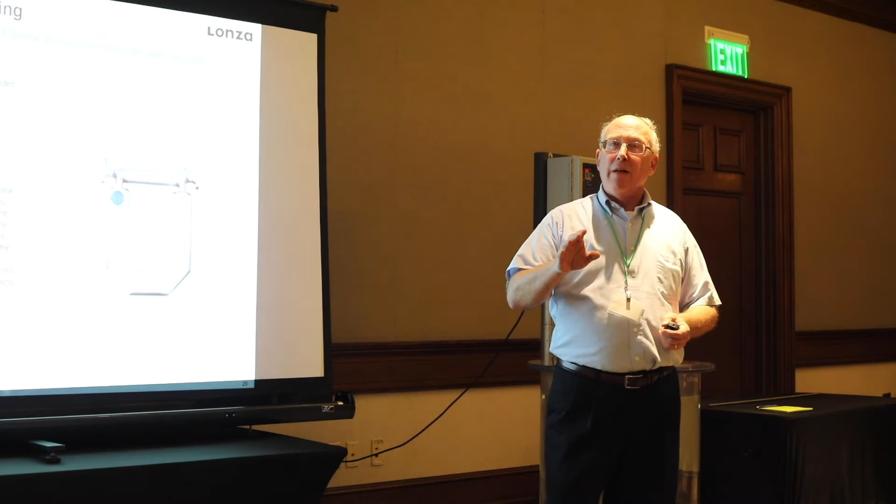With the tank completely homogeneous, I can take a side stream off of it. Take a little 2-inch line into a little 1-inch diameter pump, put a basket filter in front of it to capture any solids, and then run it through a device that looks like this. This is a Coriolis meter.

It's a little different, a different type of metering technology than anything you've ever seen. It's not a turbine meter, it's not a paddle wheel meter, it's not a mag meter. This device will measure flow, temperature, and density. If I've got temperature and density, I can calculate specific gravity.

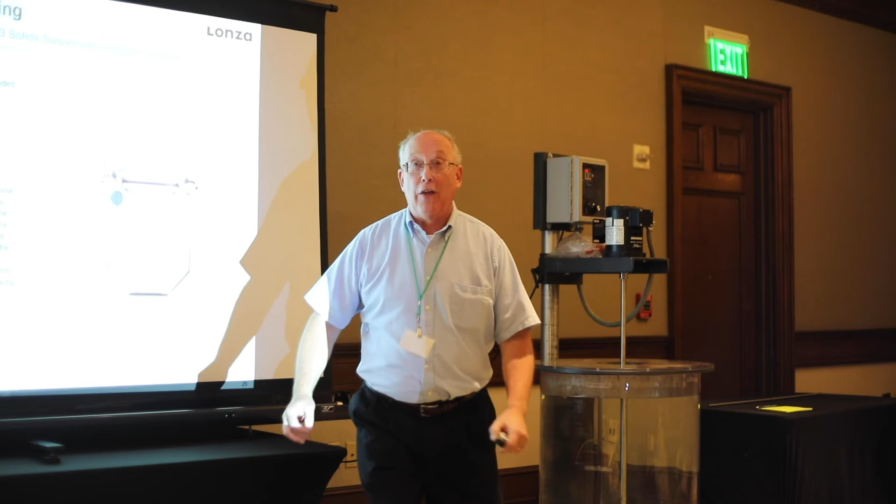This is about a $15,000 instrument. I was going to bring one. We're a Rosemount shop, and Rosemount has a sister division called Micro Motion that makes the Coriolis meters. I asked the rep, can I borrow a Coriolis meter? I have this real important meeting I want to bring it to. He said, I'll be glad to come with it. I said, no, we're not going to have you come here and peddle Coriolis meters. Okay, they're about $15,000. Just think about that - interesting application for an agitator.

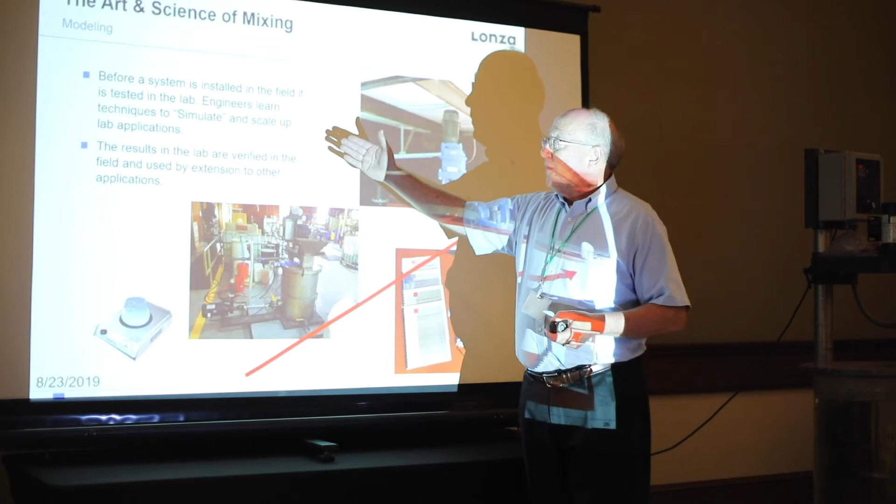Now, before a system is installed in the field, in any of those applications, we test it in the lab. We have the ability - I have a picture here - this little unit has a twin. I have a different motor apparatus with a gearbox on it, and I have a stainless steel tank. So what we can actually do is scale-up work.

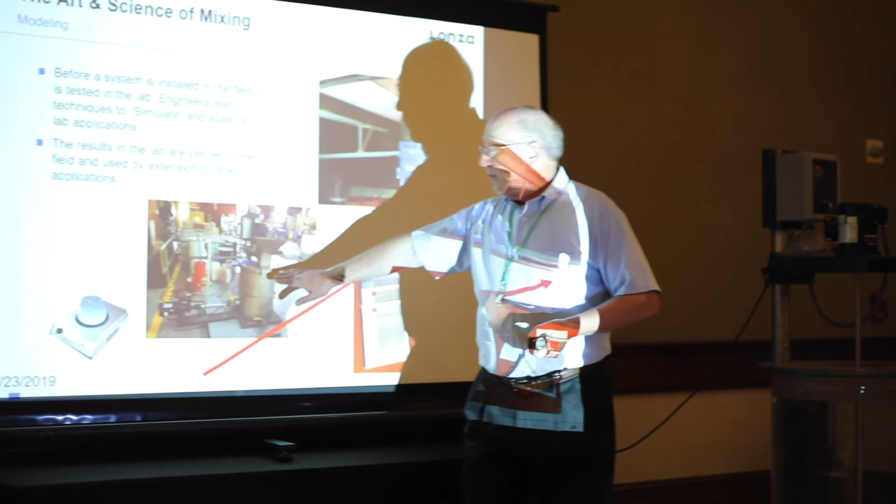If we come up with a difficult situation in the field, where we've got viscous material or small quantities, little bitty things, and we want to see if it's working, we can set up the small unit, take the information from the lab. I can back-calculate the type of blade, the speed I need to run it, how many blades, and put it in the small unit. I'm going to come pretty close to what the large unit is.

And then we've gone so far - it's a fair question to ask, well Frank, how do you know this equipment does what you're talking about? We've actually gone out in the field, climbed on top of tanks, and taken measurements of all the components in the tank at different portions of a treating cycle and mixing cycle, sent them back to the lab, and verified how effective this technology is.

With all the new Finesse chemical systems, the agitator will completely suspend microcopper azole in the work tank, along with all the mold inhibitors, the defoamer, and the water repellent, in a space of less than 180 seconds, from top to bottom. We've measured it.

Seeing is believing. So what I've got here is water, okay? I have a 3-sided impeller, a high efficiency impeller, and a 480 volt drive that's powered by 110 volt. I'll let you guys think about that - I have very brilliant people who work with me. We've got a 480 volt small horsepower motor, and I can turn it on.